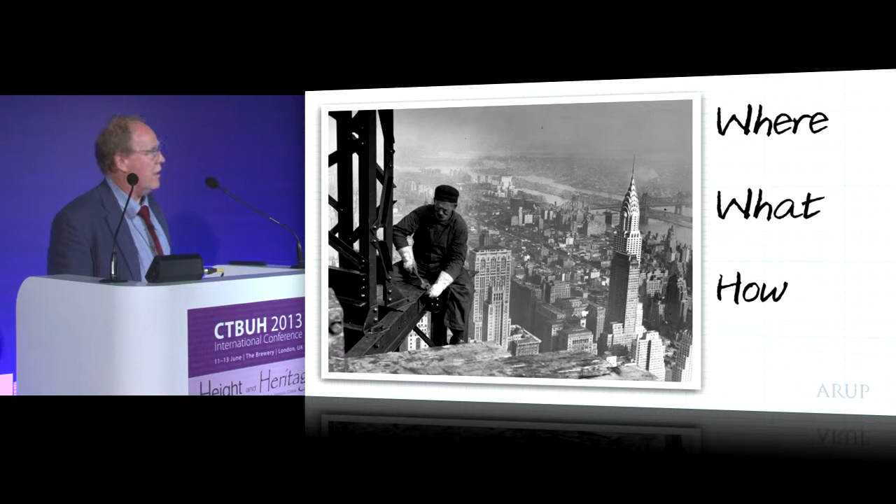When I started to prepare for this, the issues seemed to fall into two very distinct areas. One was where will we build? Literally, where on earth will we build? And secondly, how will technology affect what it is that we build? And these are very much our stepping stones. And I think somewhere bridging those two will be the product of the buildings as we head towards 2050.

And you cannot deny that there are shifts in the economy and that somehow tall buildings are directly related to financial well-being, economic well-being. Since the early part of the last century, the tall buildings have been concentrated largely in North America, I would say, some of Europe and China and Asia. And I include China as a mature economy in this, to this extent.

But I do believe that we're going to see and experience an economic shift south. China will be a mature economy by 2050. I think that Africa and South America, Central America, Indonesia, Australasia will grow immeasurably over the next 30-odd years, and that in many ways will define what it is that we do.

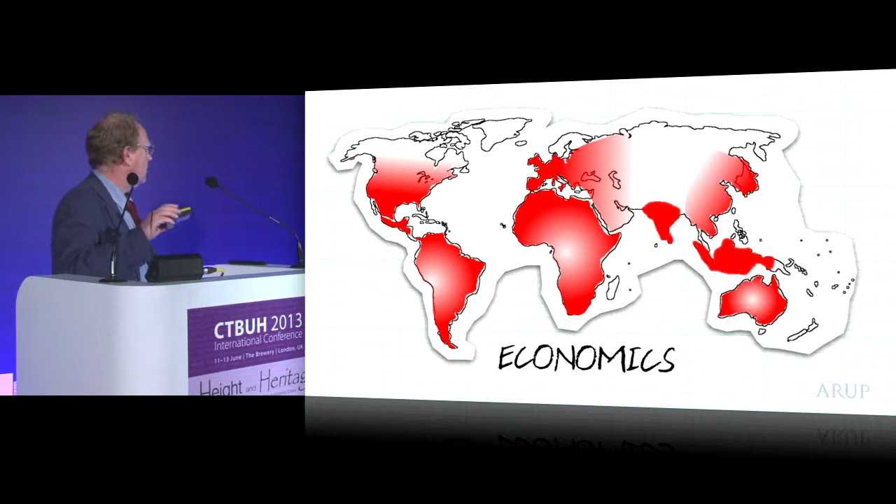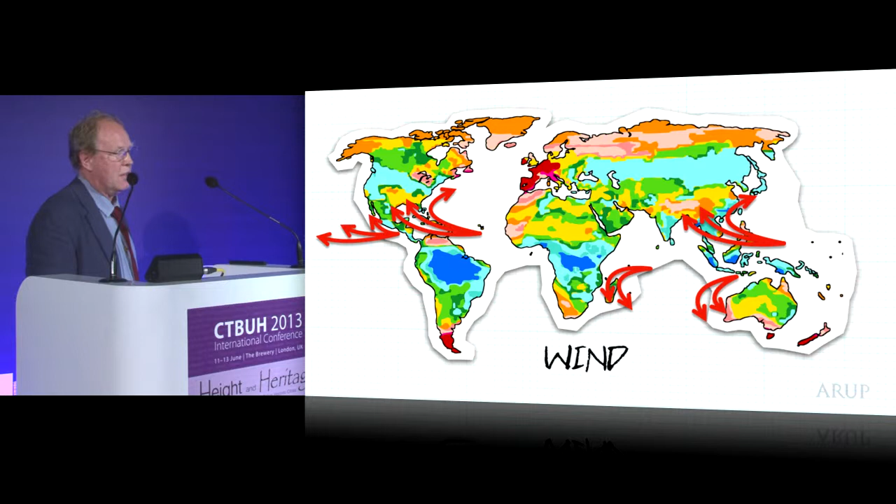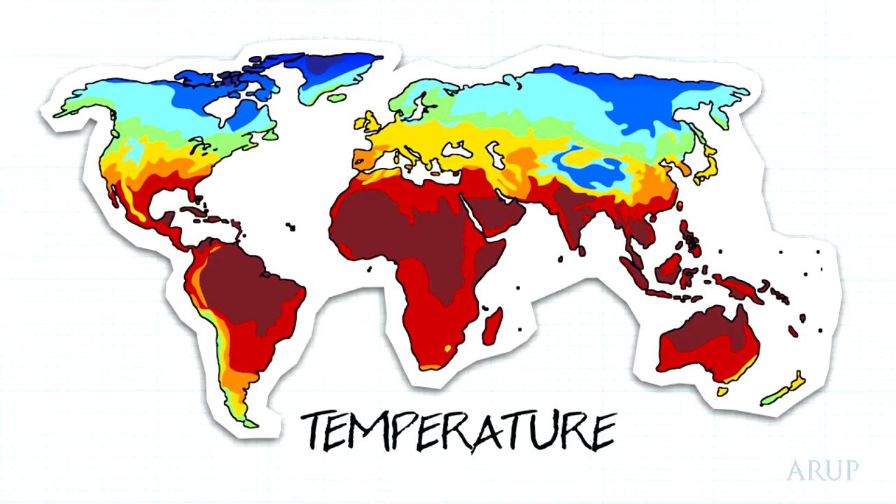If you take that geography literally, projects that were tall buildings that were previously defined by wind, stiffness and strength will give way to buildings that maybe at 40 stories are more governed by seismicity and the effects of temperature. And sustainability will be a key issue in the coming years, and I believe that this changing climate will significantly affect the construct of buildings in the very near future, and we have to start acting on that now.

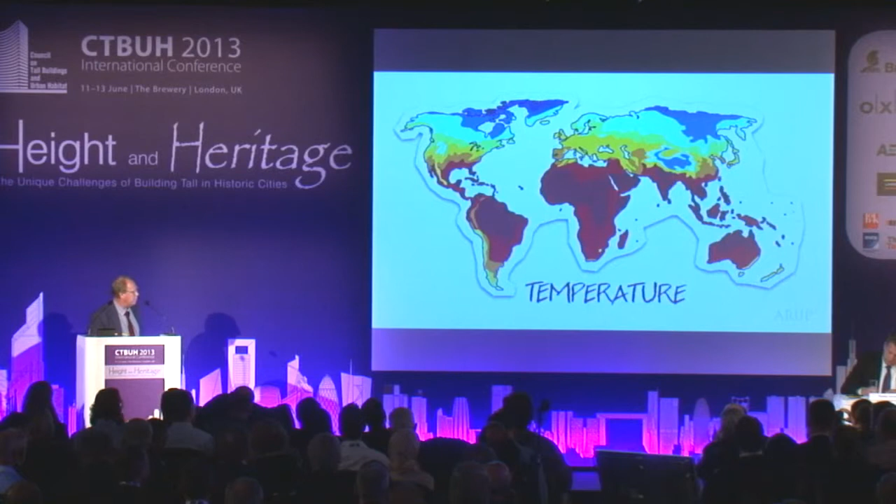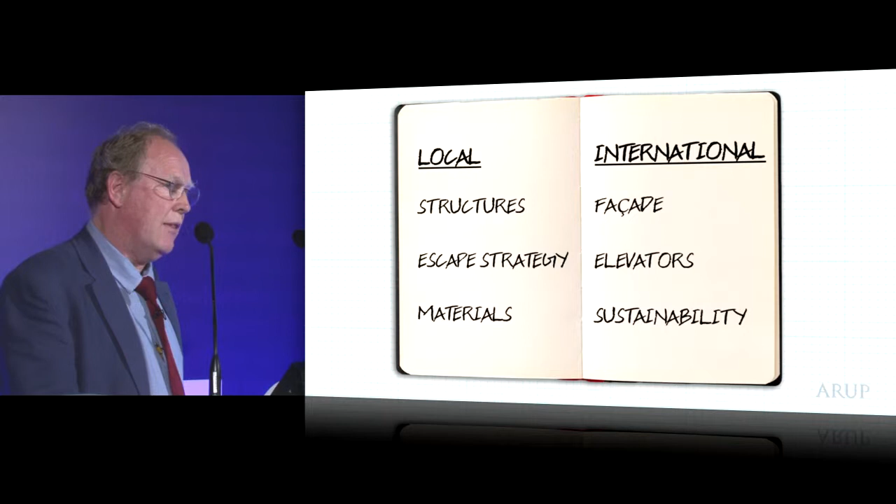If you really think in essence, there are very few issues that govern the design of a tall building, some of them local, some of them international. And the real skill is to pull together these well-known technologies and combine them in such a way that the technology and the geography work together to produce buildings that are consistent with their location.

I'm going to take three examples very, very briefly and speak to you in engineering terms. The first one is a very tall building in Seoul that we did with Renzo Piano, Joost Moolhuijzen and his partner Bart Akkerhuis. This is the Landmark Tower in Seoul. The 620-meter tall building is affected by the wind immensely.

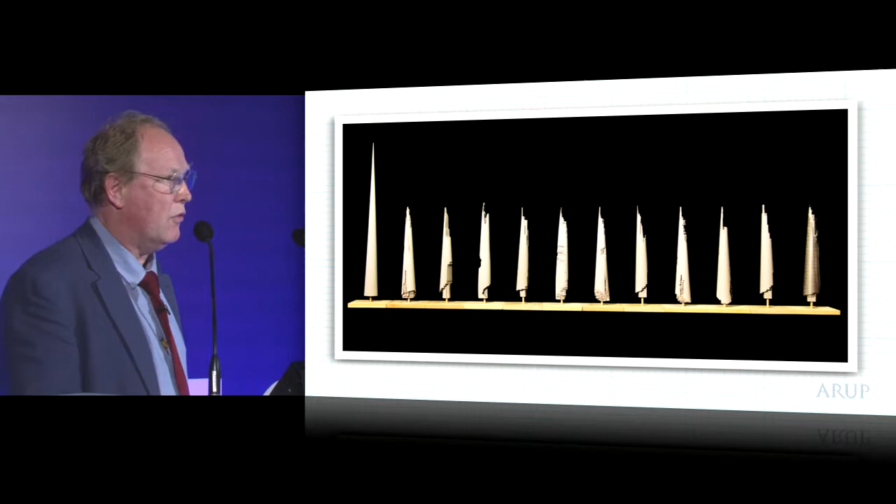And part of the architectural construct was to start with a tapered form, a conical form, very much the big brother of the Shard. Our approach was not to focus on structure immediately, but to get the elevator strategy correct using sky lobbies and stacked lifts. If we got that right, then we could liberate the floor space and make this a really economic building despite the taper.

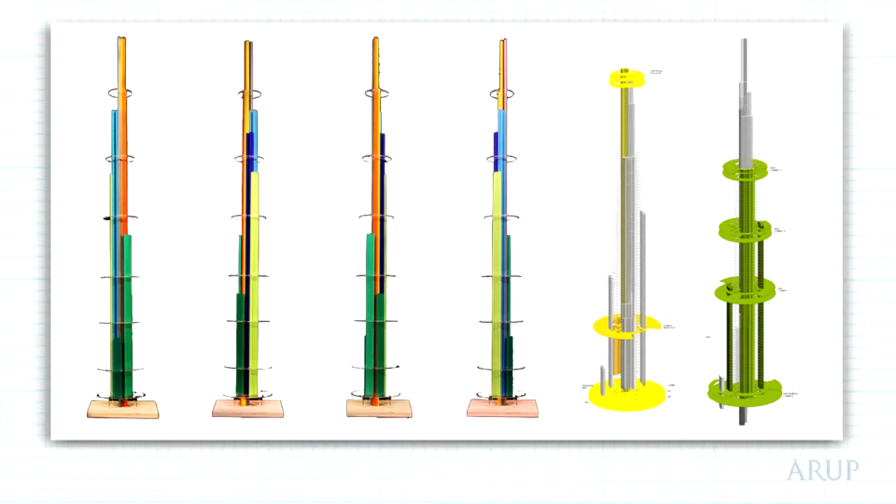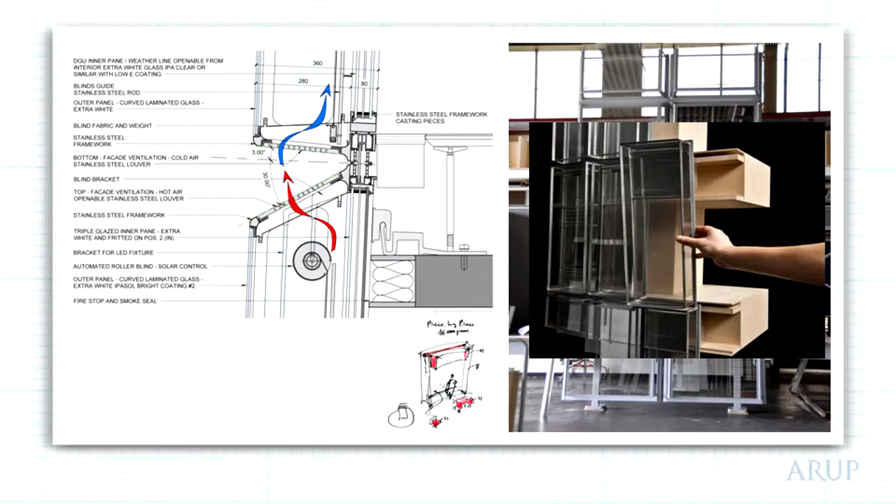Secondly, having resolved the elevators, we wanted to concentrate on the facade. That probably is the biggest influence on the environmental systems within the building. And getting that right is fundamental. Get it wrong, get the systems established, and there's no way back. Once those two things were in place, we set about the structure.

It would have been very easy for us to reach out immediately for an outrigger scheme. We didn't do that. We looked at alternatives. We were very conscious that the core could be affected by outriggers and indeed sized by the outriggers. So we looked at alternatives. You can see from these diagrams on the left that the stresses put into the core by this system are quite high, well known to many people in this room.

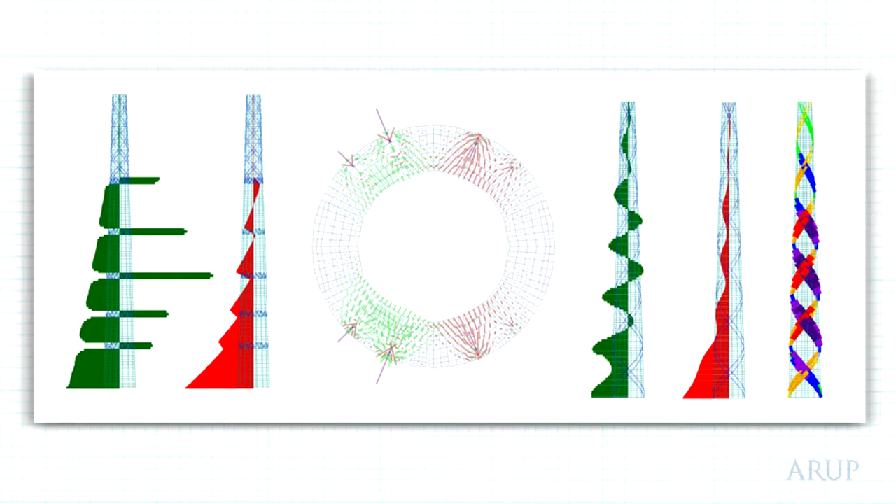There was an alternative, we felt, and we investigated, because of the virtues of a conical form, wrapping a double helix around it. What that meant was that every piece of structure, every floor, all parts of the core are gently engaged. They are gently engaged and they give us much more inherent damping.

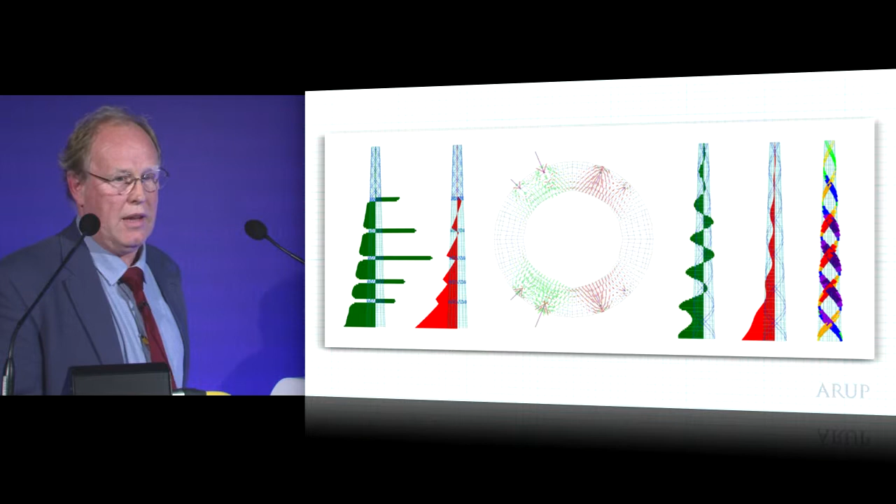And as you can see from the diagram on the right, the forces that were very acute are now smoothed out across the whole core, and there's an interplay between the outer skin and the core. And the forces that puts into the floors were all manageable. In comparison, what you see is this.

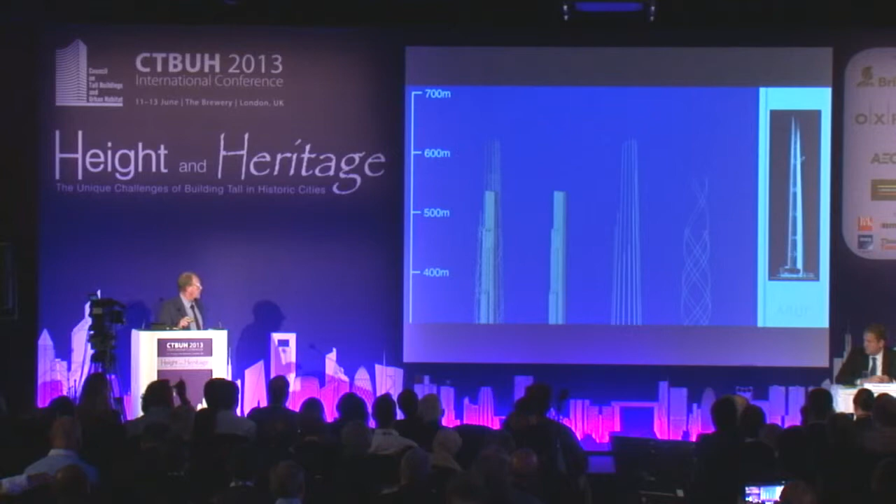That by itself, by definition, is an example of a strength-governed structure. If we look at what it is that we do in confined sites, this job was in Tokyo with Renzo Piano one more time. Very slender, 10-meter site. We were intrigued by the performance of pagodas because they had a mystical status in that part of the world, in that they withstood earthquakes well.

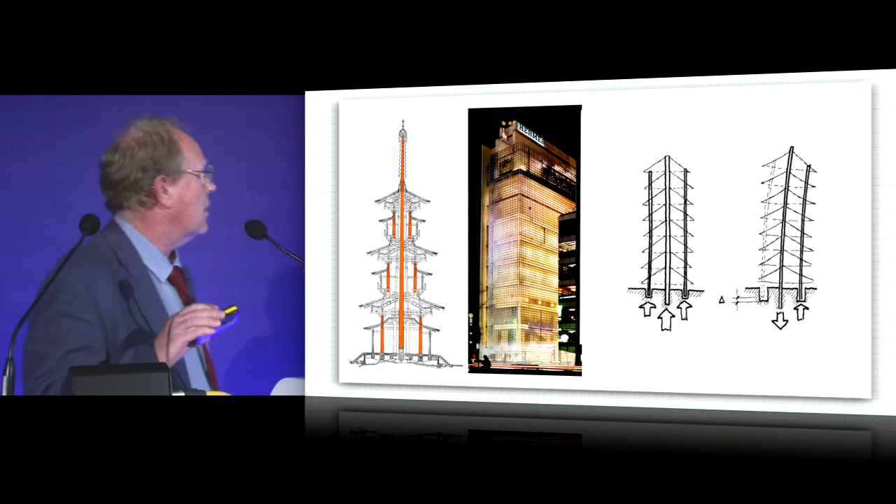We exploited that technology and introduced a stepping column. Pagoda works because it changes stiffness under lateral load. It's a period shift. It sucks less energy out of the ground. Using that, we developed a damping system, and we cut the column at the back of the building, which gave period shift and reduced stiffness, therefore less force.

The net effect of that was to reduce the overturning moment at the base by approximately 40% and remain elastic. So in a really critical condition of an intense earthquake, the building would remain serviceable. We were able to quantify that on behalf of the client, Jean-Louis Dumas, and that, of course, affected directly his ability to gain insurance and to benefit his business in that sense, and make use of almost what was previously a useless but a very, very small site, 10 meters by 50 meters, and it liberated one side of the building to give space to the site.

It was with that in mind, we designed it 15 years ago, and it's been in service for the last 13 years, and it withstood the earthquake in Tokyo very, very well. We lost a ceiling tile in the earthquake of 2011, and that was the extent of the damage. So with this confidence, we moved into a project in Mexico, which had a completely different set of problems.

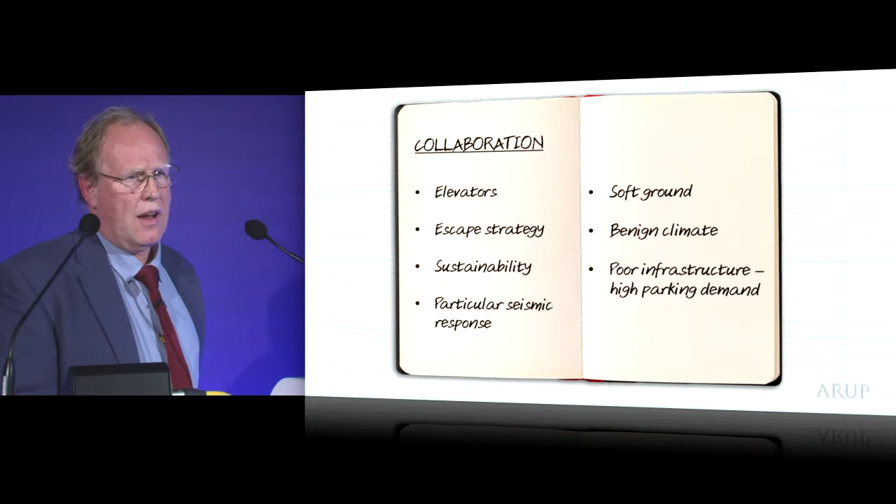The ground in Tokyo is hard, the earthquake intensity is high. In Mexico, the seismic effects are equally important, but the effects are different. And in Mexico, we had a very, very benign climate and a very particular response to earthquakes and very, very poor infrastructure, which I'll come on to.

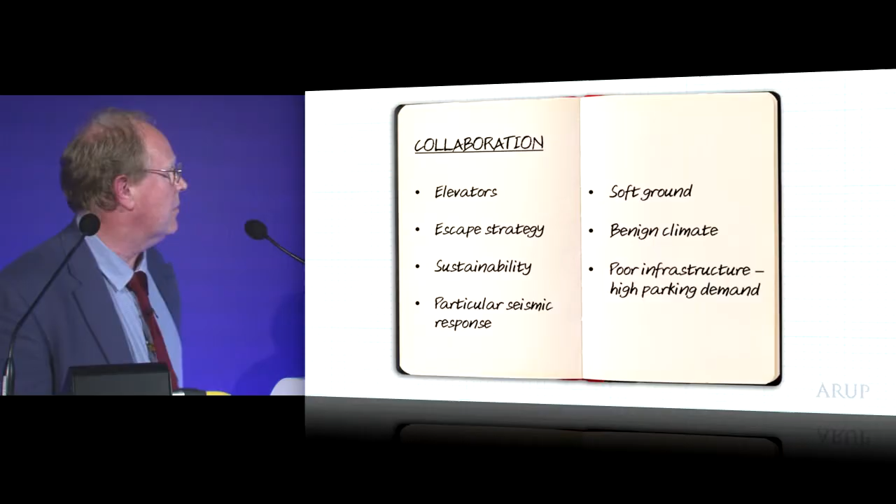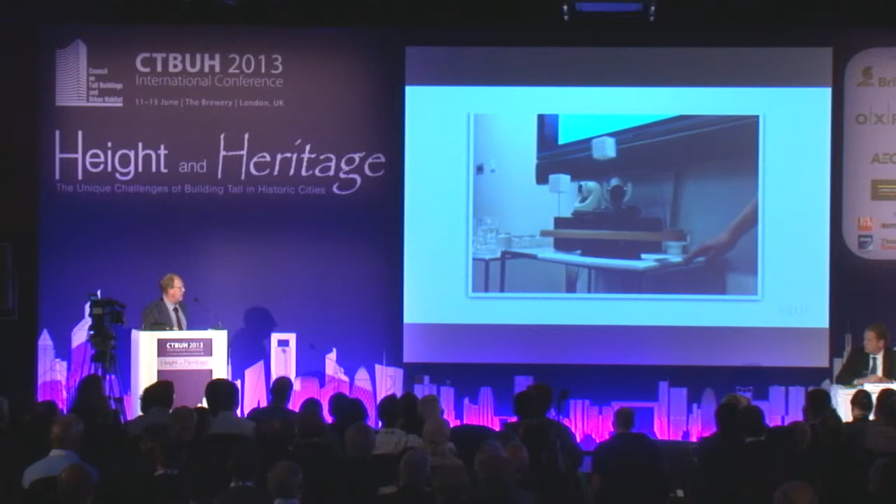Explaining what actually happens in such a complex seismic zone is difficult, so we built a model to try and explain that. As you can see, my hand on the table is putting a very small force into that piece of jelly. That piece of jelly then responds, sending an amplified signal up to the building above. And as you can see, when the mass above resonates with the jelly, you get excessive movement and excessive forces.

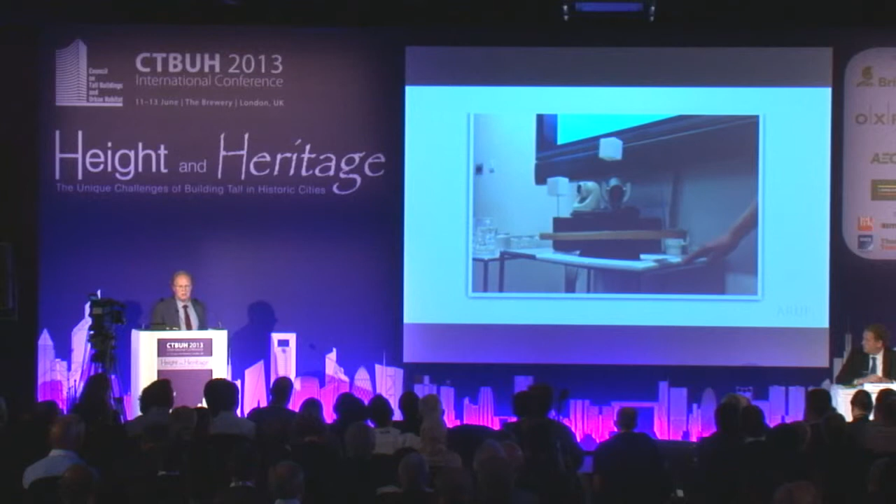We wanted to avoid that, but trying to express that to a lay body is quite difficult. However, what you see there is actually the principles of the design criteria that we used to develop our tower in Mexico.

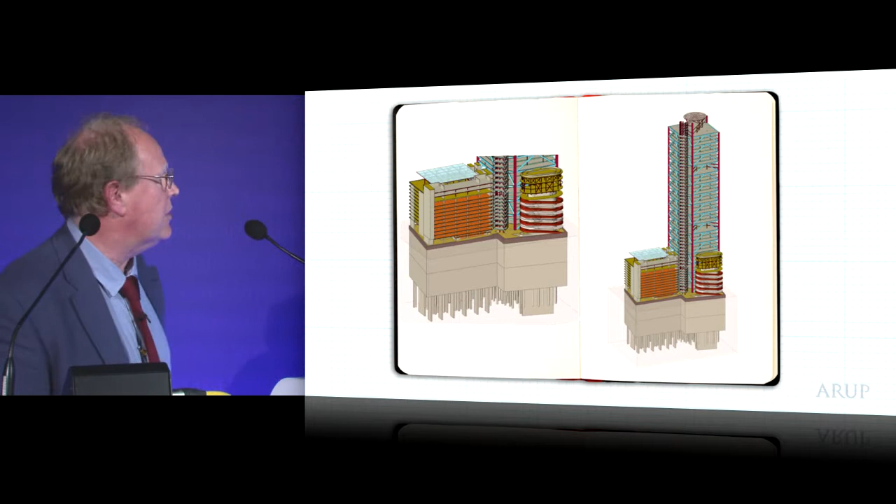You will see from this diagram that there's a huge block at the bottom of the tower. That is to house 2,800 cars. Compare that with the Shard, which had only 48 car parking spaces. There is no infrastructure in Mexico City. You inherit a huge carbon footprint as a result of building in these geographies. We decided also to make the building as light and as ductile as possible. For that, we used an external megaframe with no core.

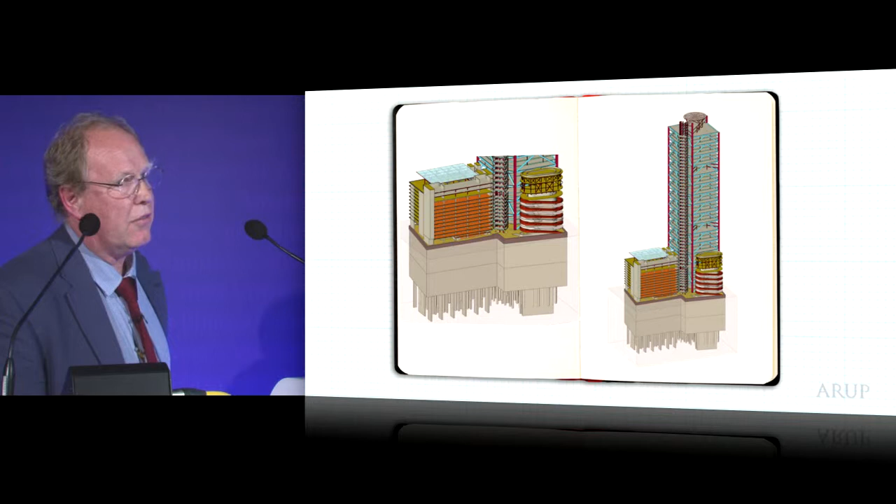The climate affected the systems within the building. It gave us the opportunity to downspec the facade and cut direct sunlight by using a veil on the outside of the building. The four sides are different. They are different because they react differently to each elevation, and the way that the sun hits that, albeit that there's a very high sunpath in Mexico.

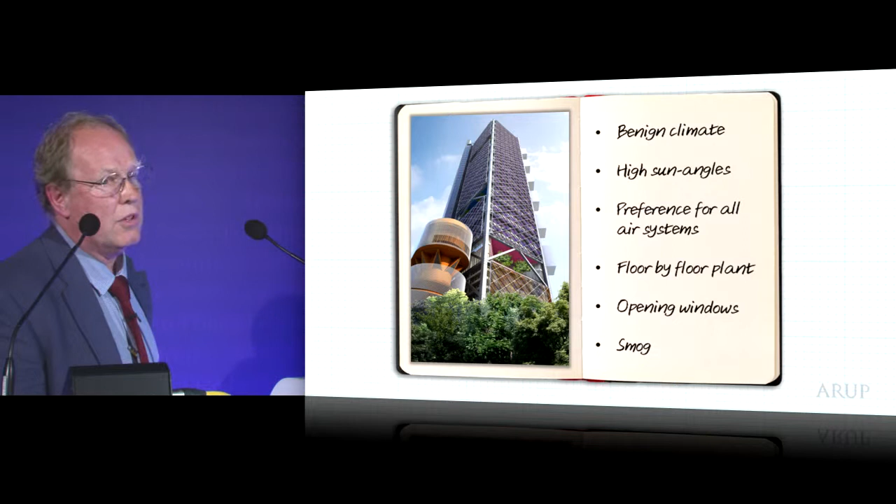We could look at opening windows at certain points, and we could free the facade, hang the facade as a curtain over 3 stories to absorb seismic deformations. And here you can see the mock-up of the facade. You can see the external megaframe, which actually characterizes the building.

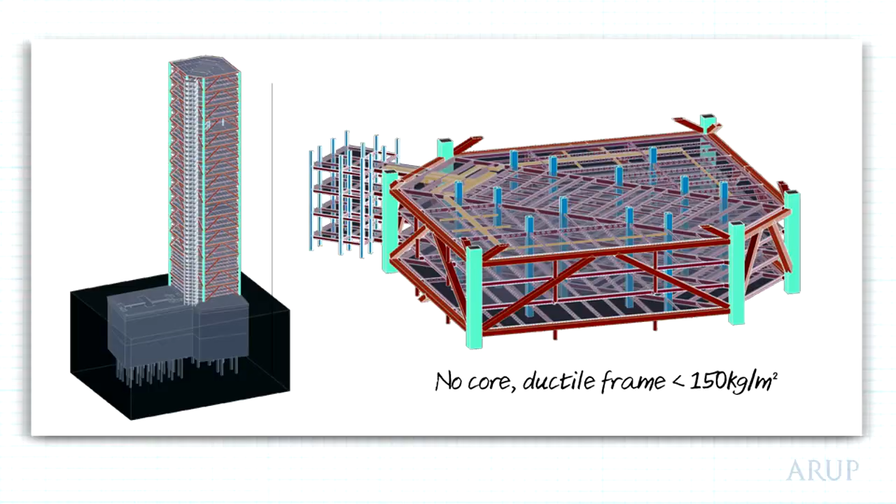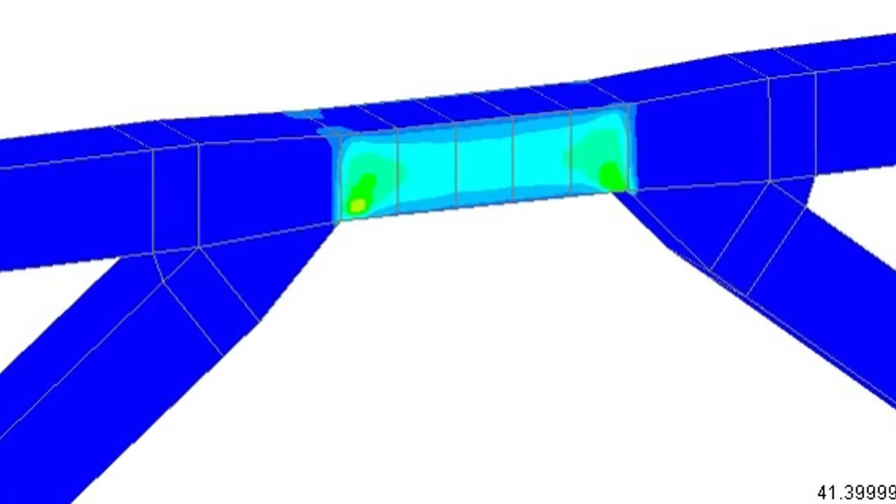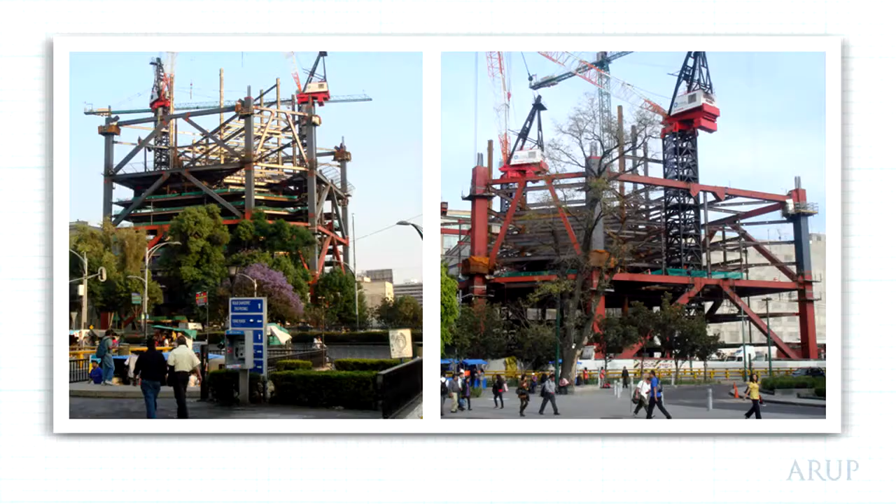It is controlled ductility, it is controlled failure. That means that it takes stress out of the system as a whole, it takes force out of the system as a whole, and makes the performance of the structure that much more economic. Some snapshots of this actually being built and going up. We're about level 27 at the moment.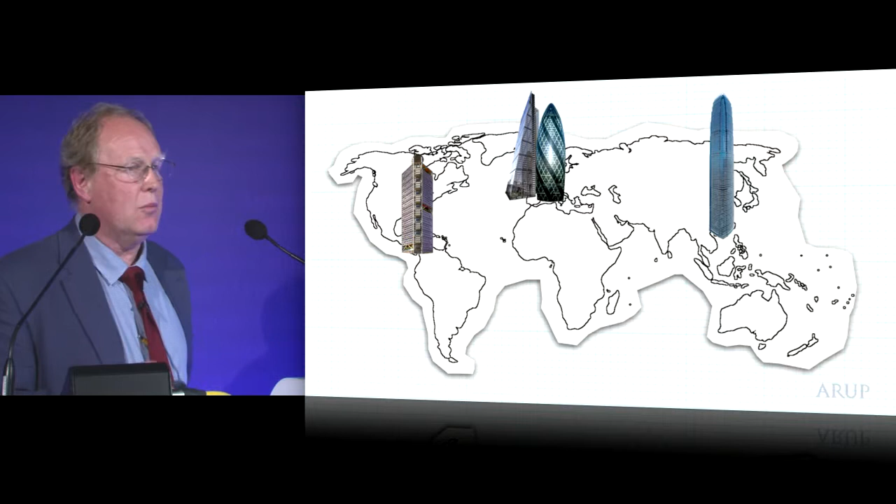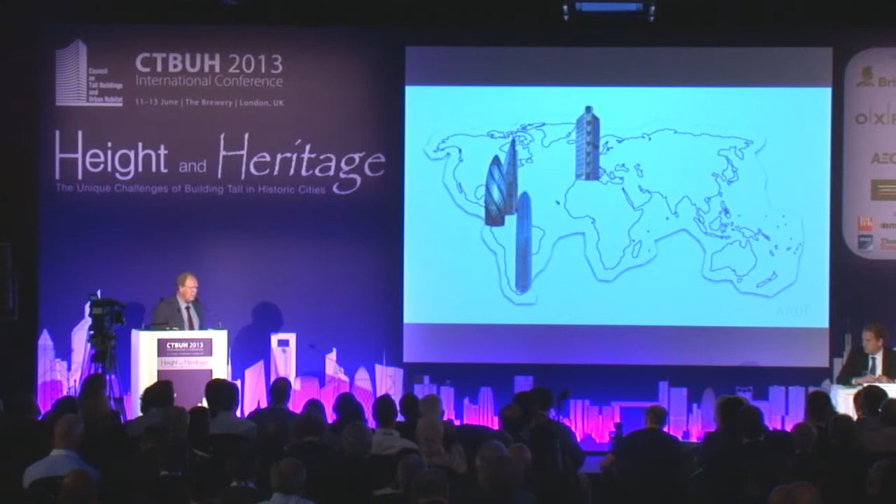With that in mind, we make a very clear case for designing for geography, that we cannot simply transport designs, templates from one country to another and hope that they work. There has to be a conscious decision on form. But just by way of a little fun, what we did was to test that. And we took 4 of our buildings, and in a digital sense, we moved them around the world. We were very keen to see how they would perform in new geographies.

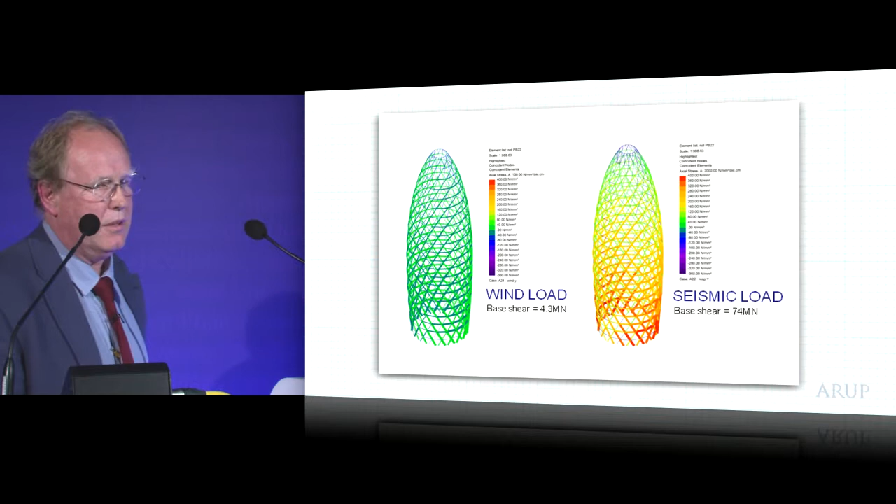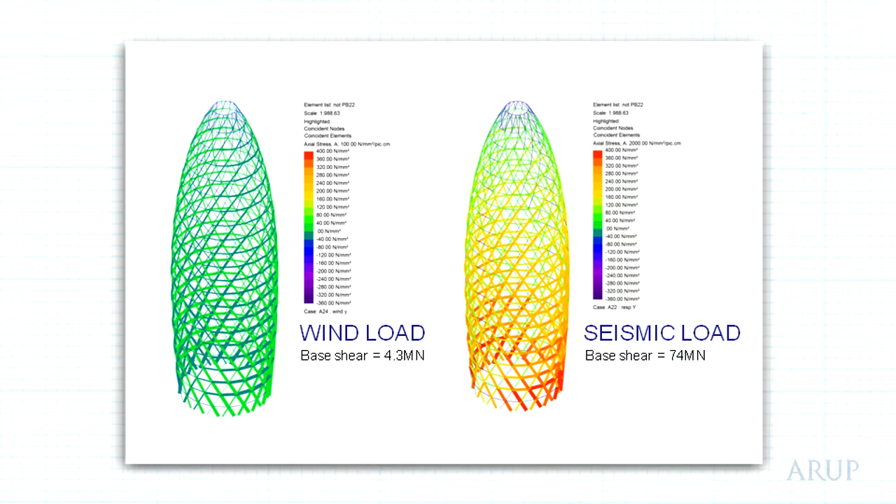So we took the Gherkin and we took it to Mexico City. And what is an absolutely fantastic building in London, less than 130 kgs a square meter, that gets the wind for free by virtue of its geometry and its construction. Take it to Mexico, and you can see that you increase the base shear on the building by a factor of 17. Those of you in the room that practice seismic engineering will understand that there are ways of reducing seismic forces. I doubt very much by that much.

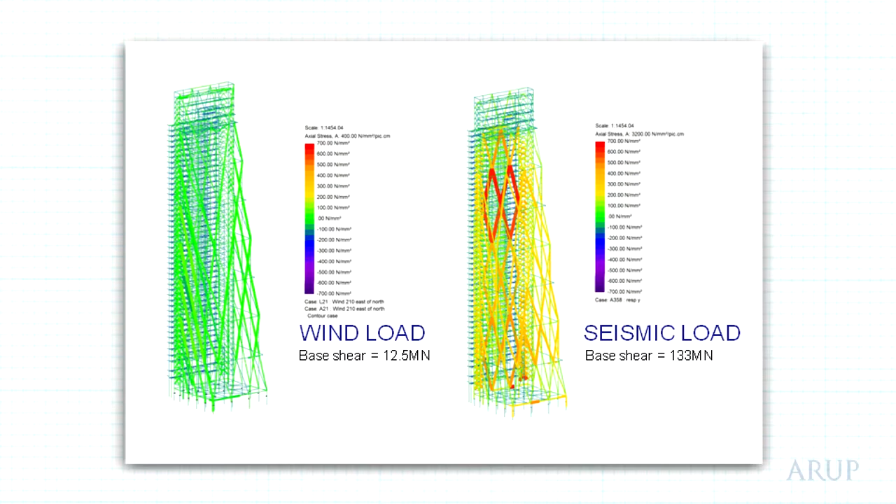Equally, we then shifted Leadenhall to a similar location, and the base shear increased by a factor of 10. But the real issue there was that the top of the building was overstressed. It picked up a high mode response. So the way that building vibrated induced forces at high level that, if left untreated, could shear the top of the building. So again, much of this is soluble, but it's demonstrating that there are appropriate forms for geographies. There are designs that suit particular locations.

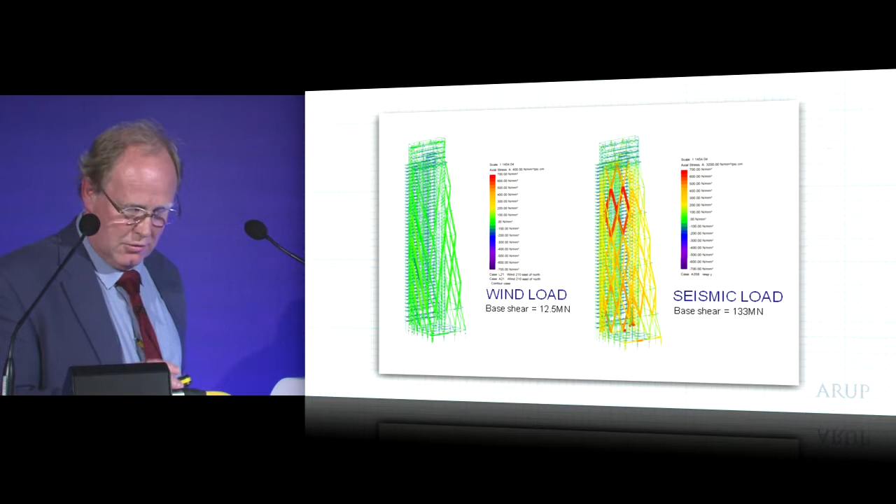Conversely, shifting our BBVA model to London, it performed reasonably well. It was about 1/8 of the base shear elastic that we developed in Mexico. And what this is meant to show, and hopefully does show, is that when we pass this amplified signal that comes through the jelly of Mexico City into the structure, we are not getting what we would term a mode 1 response. That is to say, the building is snaking. And the way it snakes and the forces that draws in are dissipated in a controlled manner.

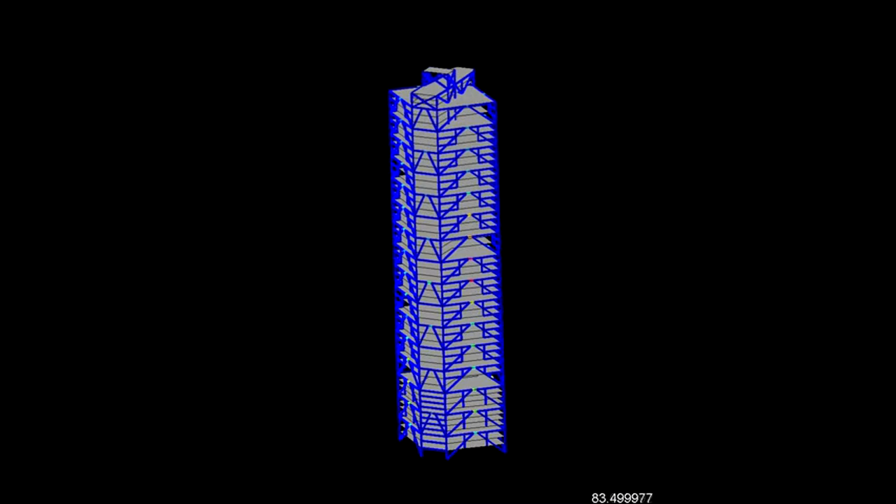This demonstrates the way in which the structure would fail or would yield in a catastrophic event, and were that to ever materialize, most of Mexico City would be wiped out anyway. But this building is life safe and could be, under certain circumstances, refurbished.

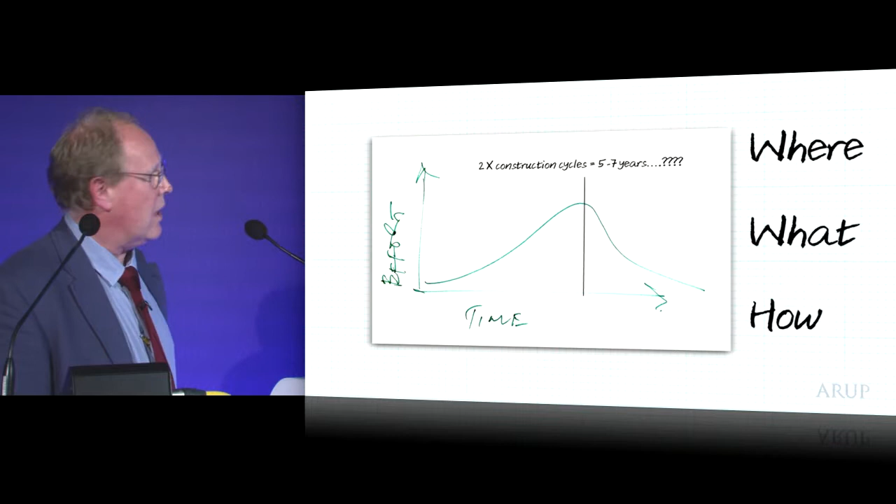So, just to try and wrap up very, very quickly, when we do move to these new countries and we do find the new forms, our experience in China, our experience in Hong Kong when I was there in '82, and certain places like Dubai, there has been a natural cycle by which costs become stabilized, techniques are stabilized, knowledge of the industry grows, and I would suggest that that's about a construction cycle, 2 construction cycles, maybe 5 to 7 years. So that gives the emerging economies time to think and prepare.

Time to think and prepare for what? Well, I think that the lessons learned in a geographical sense, particularly in Asia, where in the last 10 years they've built more tall buildings than the rest of the world in the last 50. That there is a responsibility to the industry in that world to share knowledge. There is a responsibility to lead because there are important lessons learned in the construction of high-rise buildings.

In those parts of the world in which the tall building is well established, I think the responsibilities lie there in refurbishing and caring for the buildings that already exist. There is a responsibility to improve the energy performance of those buildings, maybe in the cladding, and most of all, to take care of the infrastructure that serves those buildings, because tall buildings are ever so reliant on good infrastructure. I think we've heard that time and time again at this conference.

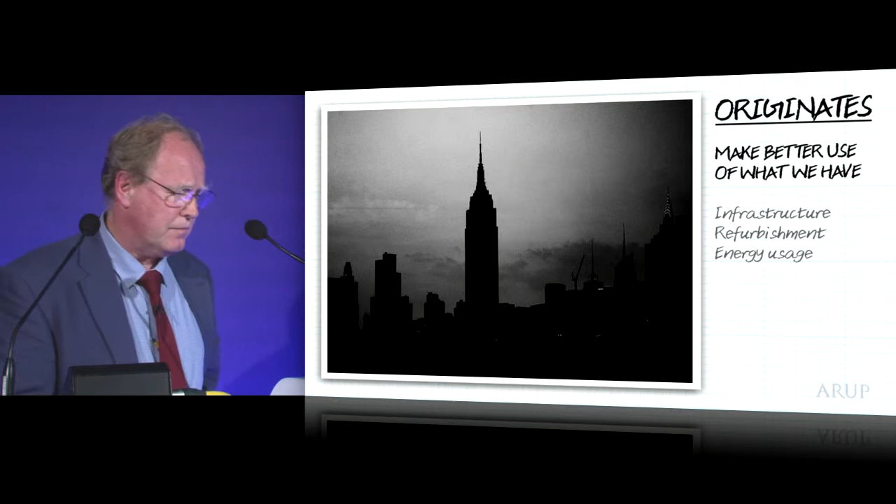And then there are those parts of the world that have tolerated the high buildings, tall buildings, and I include London in that. I think we've woken up in the last 10 years. However, London is a fantastic place to build tall buildings. The climate is benign. We don't have earthquakes. It's not too windy. The ground isn't bad. It's possible to make some fantastic projects in and under these conditions.

But to do that, we need to keep our transport hubs up to date. We need to think about some of the things Peter aired yesterday morning, of having good strategic planning and really finding political support for the construction industry and what it wants to achieve.

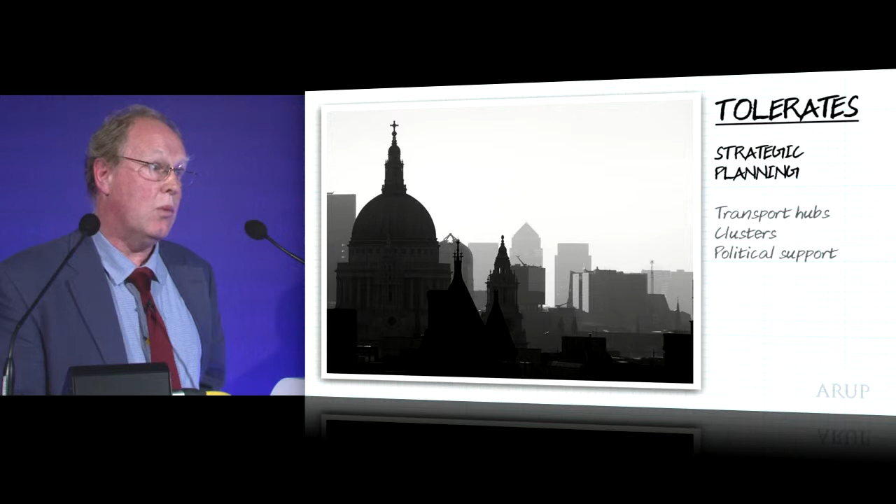But the real incentives, I feel, lie in Central, South America, some of Africa, and India. And India is in some ways an established economy, but is growing at an incredible rate. And when moving to these areas, I really think that there's time now to get it right. Not a lot of time to get it right. What do I mean by getting it right?

I mean that the codes and standards need to be brought up to date to reflect best international practice. The Council on Tall Buildings did wonderful work in introducing performance-based design. I think that needs now to be embedded into the codes and regulations of these emerging economies very, very quickly, so that when this wave comes through, it's ready for it.

It's important to get the planning aims correct, that the city planning is well thought through, and how that would relate to what we have in London, I do not know, but maybe that's a question for others in the audience. But really, to find some governmental and economic policies that are consistent and stable over a period to give the entrepreneurs, the investors, the opportunity to invest with some confidence. I think those 3 or 4 things are absolutely essential throughout South America, Central America, and really what are the emerging economies.

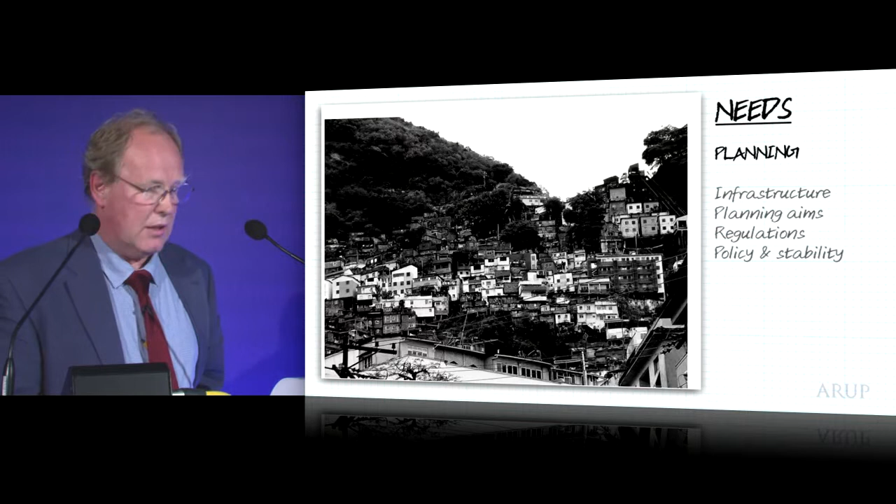So if I were to put responses to my stepping stones, what would they be? I would say that the where component, the geographical component, is very definitely Asia. It is South America, it is India. China is an established economy in these terms and will power on. I see the what, the technological element to what it is that we are trying to achieve, largely focusing on energy conservation and infrastructure, which is a strange thing to say for a structural engineer interested in tall buildings. But these really are the key issues in my view. Time and time again we come across it.

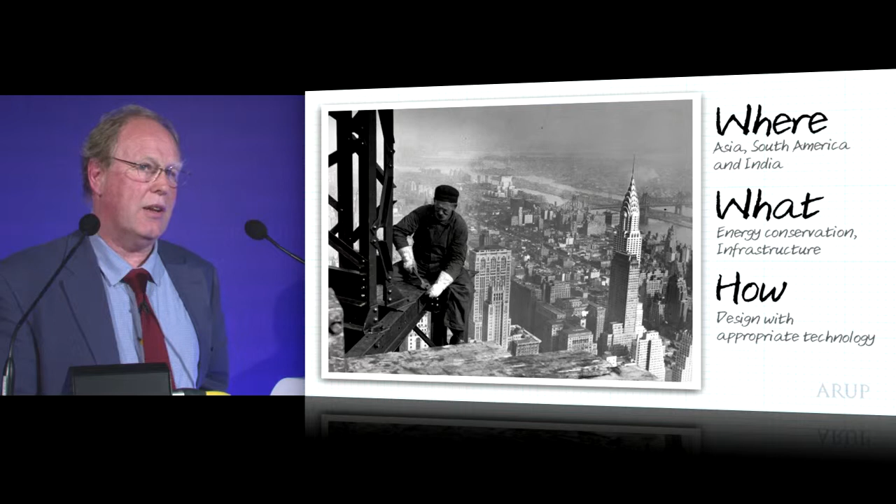And finally, I think it's to design with appropriate technology. That is to say, not transporting template designs, forcing them on the local market and literally hoping that they work. I think we've made a fatal mistake if we carry on in that way.

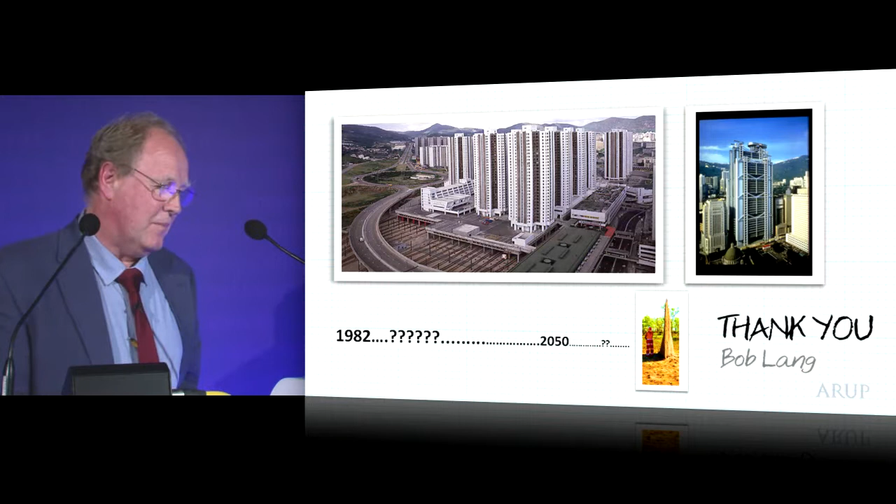Really, just to close down, as I've been given my marching orders, I started work in Arups in 1982. I started work on Chai Wan Depot at the same time Ken was working on the bank. I wasn't too happy with that. I felt that working on the mass housing project was a kind of second-class role. But what you see in Hong Kong now is that the techniques we perfected in the late 70s, early 80s have been replicated ad nauseam.

And somehow, if the cities continue to grow, densification is a real issue. And we've got to find a way of making Chai Wan Depot a pleasant place to live, because the constant gobbling up of land, particularly in Britain, is simply not acceptable. I'll leave you with that thought.